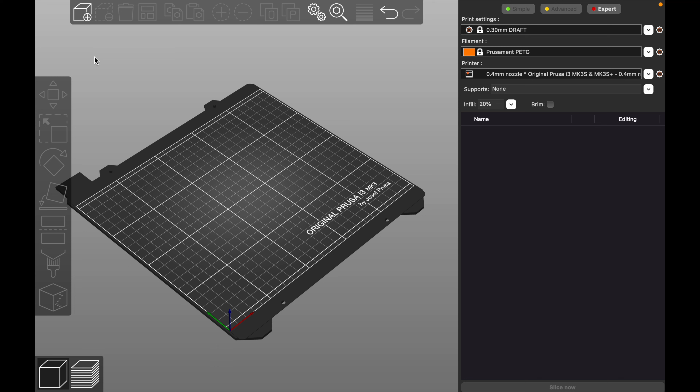We are creating our Bokeh filter in PrusaSlicer from the blank filter. If we go to add and import this camera bokeh filter blank, it'll open and we see it.

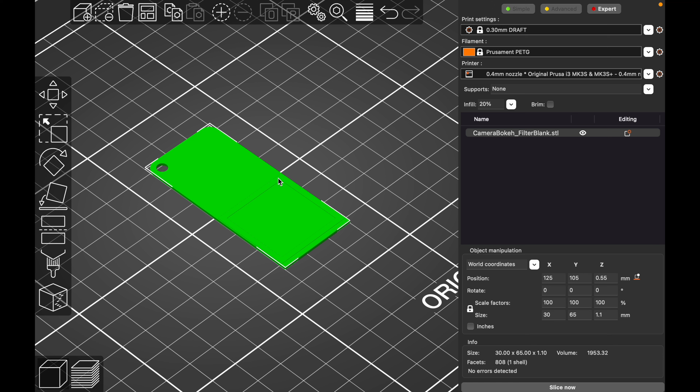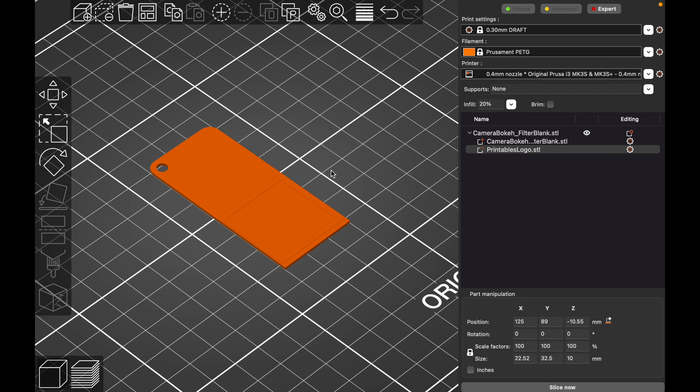It has this square where I put a 1mm box to show where we have to put our negative image. If we right click on the model and add negative volume, load, and select the model we want - this time the printables logo. Zoom out because sometimes it imports not where you are but on the other side of the screen. If we take this guy and bring him over to our model, we see it's going to be a little bit too big for our box.

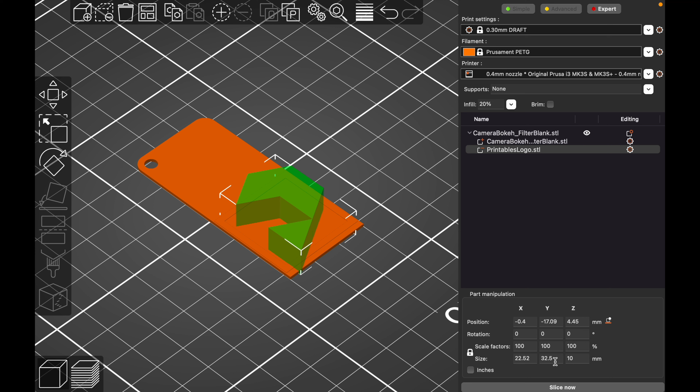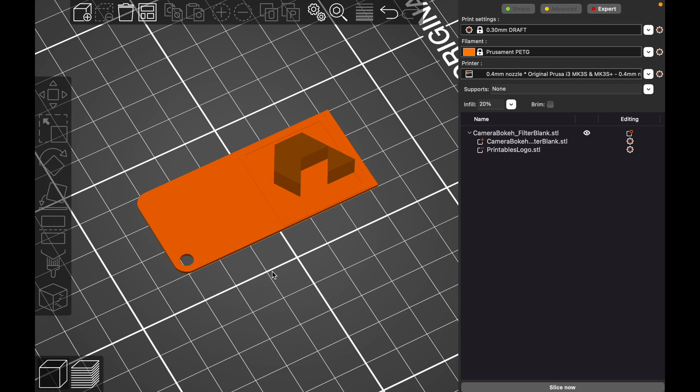Since the scale is on and it will constrain the proportions, we want about 22 to 23 millimeters for the longest dimension. So if we do 22.5 there, and now we're going to look around.

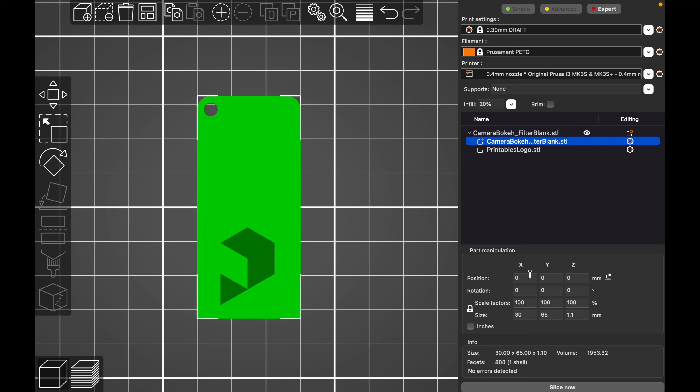It's actually looking pretty good for where we have our box. The only thing is it's offset just a little bit from the middle. But we know that our camera bokeh is at position 0 on the x-axis, so we can also put our printables logo on the 0 point at the x-axis, and it moves so everything is aligned now.

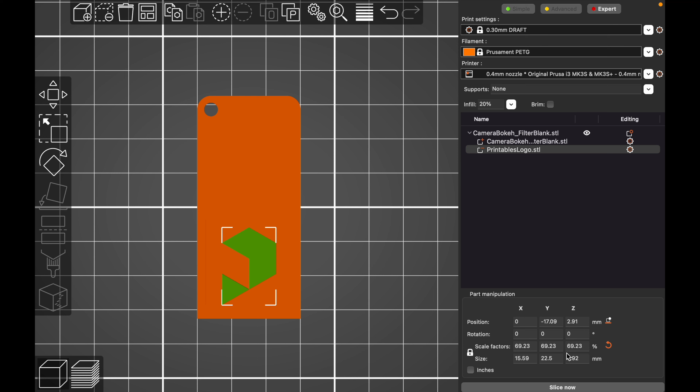We want to put this printables logo and drop it to the bed. The Z changes, and now we can slice.

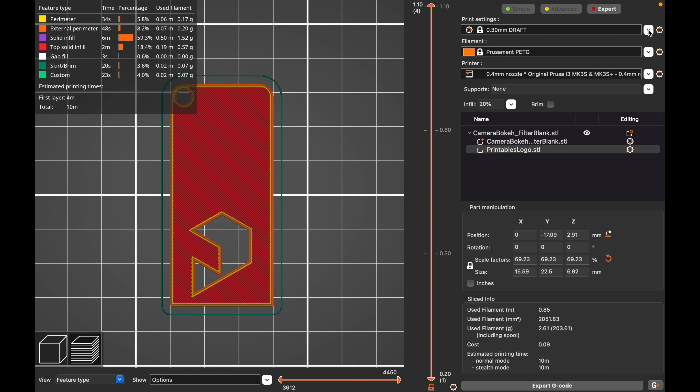We will have our printables logo negative from our blank filter, and you'll notice we don't see our box during the printing. But this is only if we're printing at 0.3 millimeters. If we choose any other layer height and slice now, we will see it.

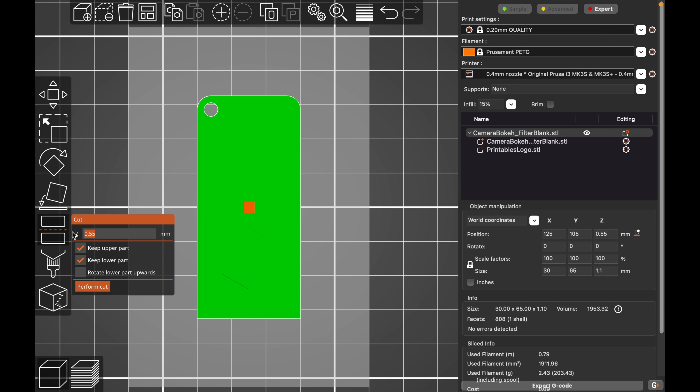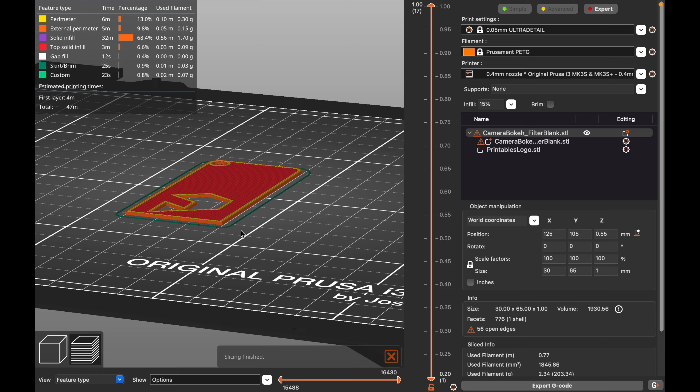Now the box will not show up when we print it at any dimension. We can choose ultra detail and it's still not there because it doesn't exist anymore.

I print at 0.3 millimeters because this doesn't have to be highly detailed, and it's going to look very good no matter what the layer height is. We can export a G-code right here. We don't have to perform the cut, but we can.

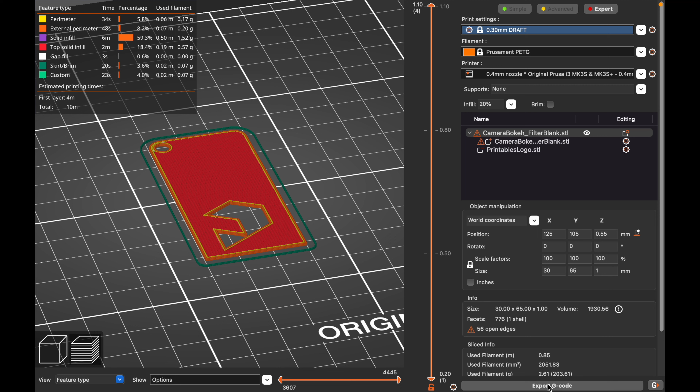PrusaSlicer is nice in that it has this option for creating a negative shape off of our main model. However, we cannot save the model as this. So if we want to do that, we have to open it in some CAD program. One of the easiest ones that I started out with is TinkerCad, and I'll show you how to do that right now.

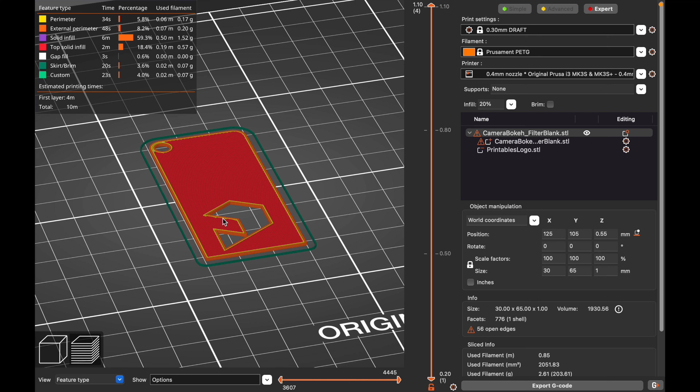We are here in TinkerCad again, creating our Bokeh filter out of the blank filter. If we create a new document, we can go up here to the left and select this to rename our file to whatever we want, or we can just keep the default funky name that TinkerCad gives us.

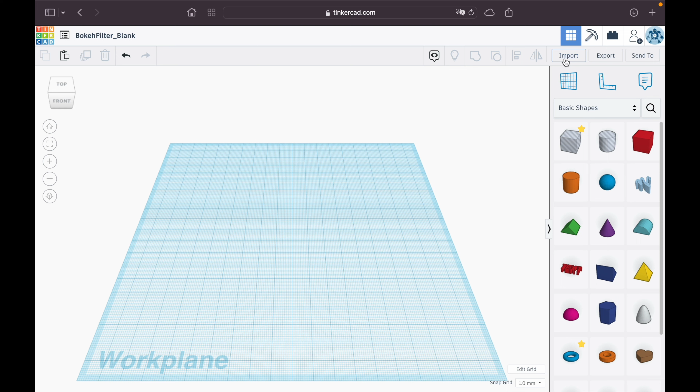Now we're going to go over to the right and select import, choose file. We want our camera bokeh filter blank. Everything looks correct, we don't have to scale anything. It imports perfectly. Now we see it still has the square that we bound our image into to create our negative from, so it's always in the correct place.

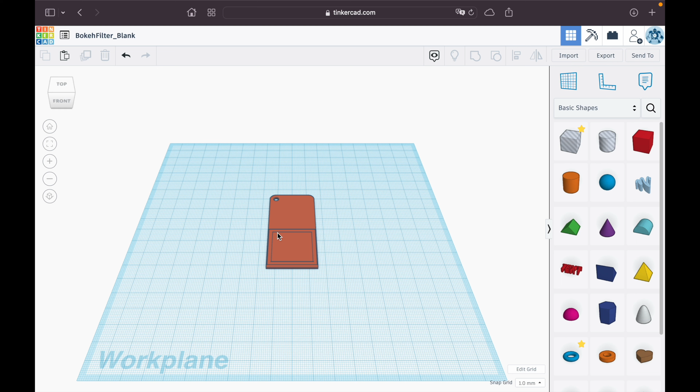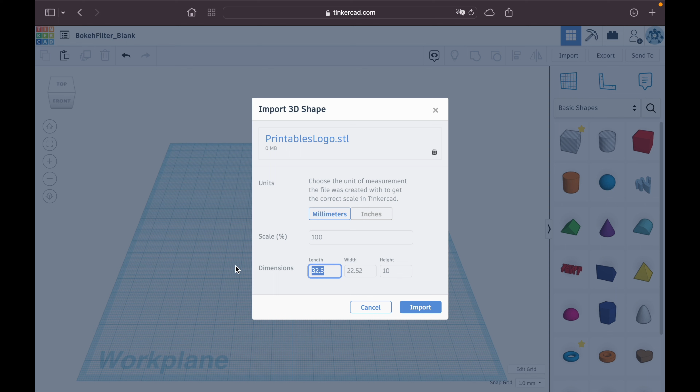Now we're going to import the printables logo, upload. Everything looks decent. We could change our length to about 22.5 because we wanted 22.5, but we're not going to do that right now. I'll show you another way.

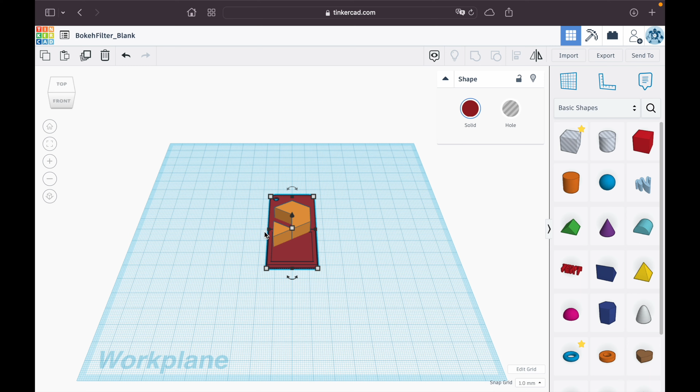So we're going to import this as is, and these kind of look close to each other, so we're going to change this color to give it more contrast. There we go. Now we are going to zoom in, and we can see that this is probably not going to fit in there very well.

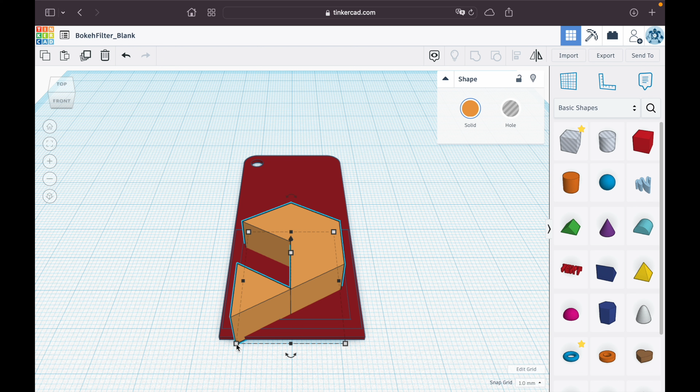And no, it doesn't. So we're going to reset view, and we are going to go to one corner, hold down the shift key, and drag it so that our biggest proportion is between 22 and 23.

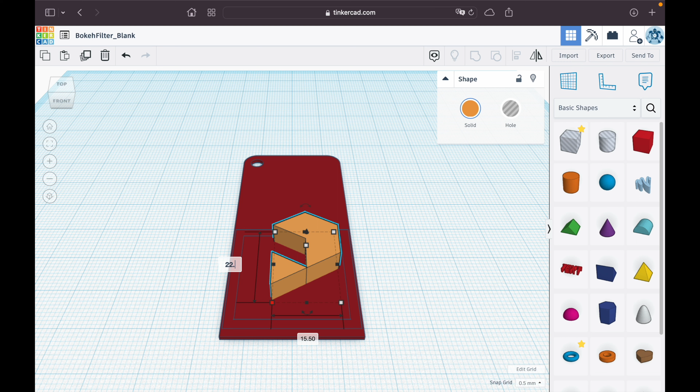If we would want to, we could go down here, change the grid to whatever we wanted, and that would give us more control over the exact size. Or we could, holding down our shift key, click it, let go of the shift key, enter your value, hold down the shift key again, and select away. Then it constrains still.

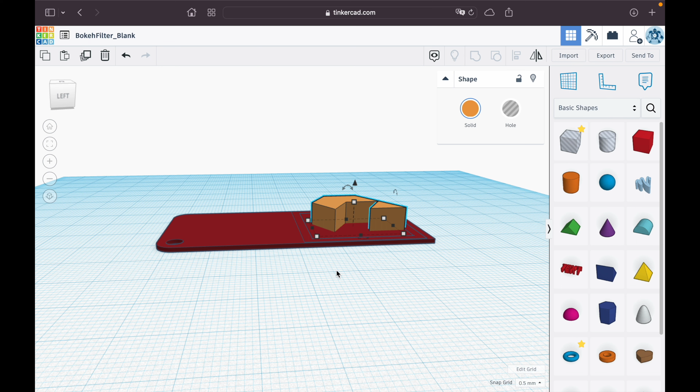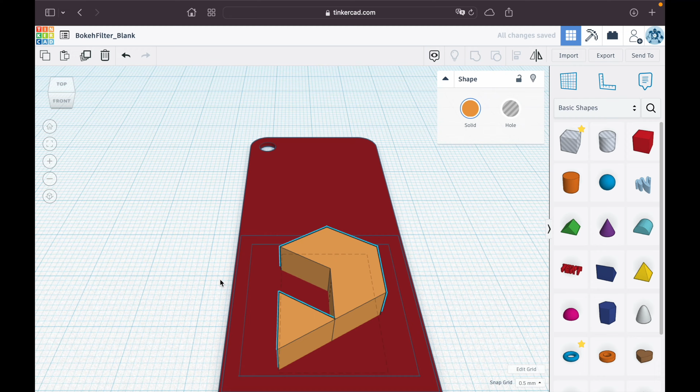Now our printables logo will be inside the box vertically. Because I'm bad at zooming on TinkerCad, we are going to reset the view and zoom it this way. We're going to zoom again.

Okay, that looks very perfect that way, but we want to select both of them, and we're going to go up here to align and select middle, and now we can see that not only are we aligned vertically, we're aligned horizontally in the middle.

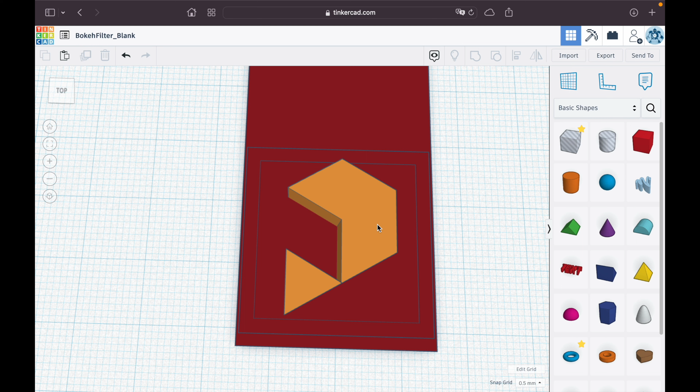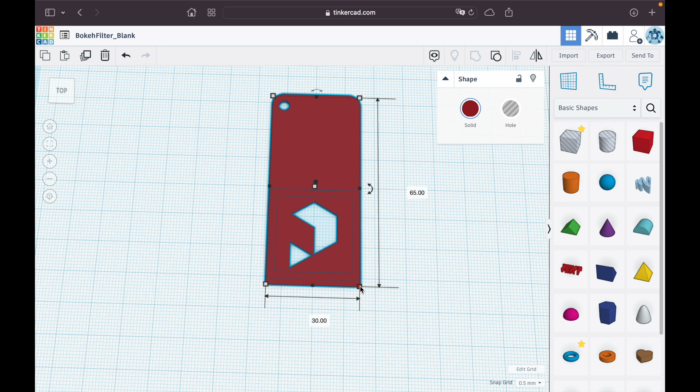Now if we go to our printables logo model, we can select hole, grab both, group them, you have your negative image. Now you could go and export the file up here, and that 0.1 millimeter box won't matter at all.

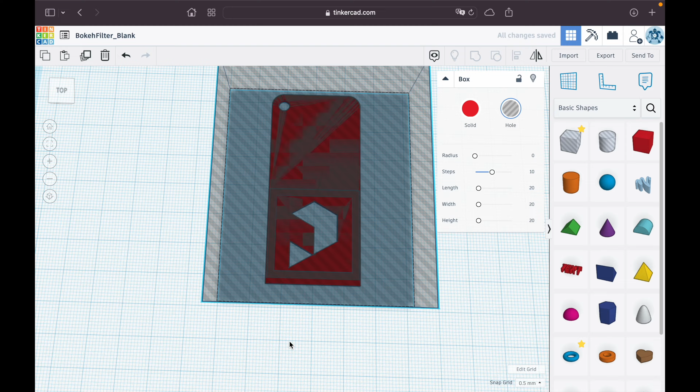Or we could go one step farther and just make sure that the box covers it. We will bump this up to 1 so that once we group these two together, we'll still have the shape, but all we're cutting off is the guide box.

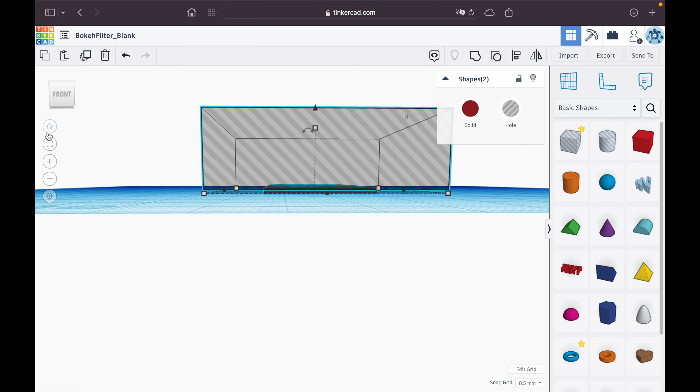So if we select, we're going to change our view so we can see it better. Group again. It took off the box. Now we can export here.